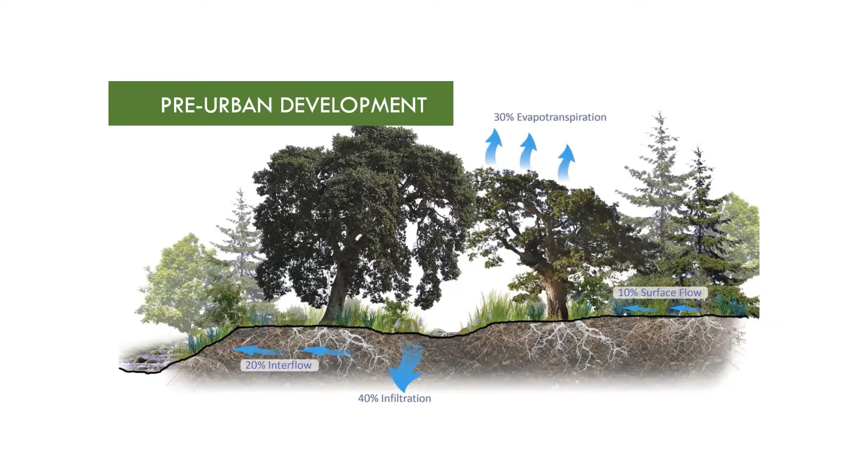Let's do a quick crash course on stormwater and how we can help schools become resilient landscapes for more comfortable, enjoyable, and dynamic learning spaces for students that can also help our communities reduce pollution and adapt to climate change impacts. In a pre-urban development condition, a healthy, undisturbed landscape acts like a sponge by capturing, absorbing, and slowing the flow of water from the moment a raindrop lands on the ground. So this is how water should naturally cycle through the landscape.

But when cities develop, impervious surfaces are created that prevent water from being absorbed. Additionally, pollutants from streets and homes are washed into pipes and the closest bodies of water. The high volume and velocity of stormwater can impact the ecology of local creeks in the bay and the ocean, and also introduce harmful pollutants like litter, plastics, and a whole array of chemicals into the drainage system.

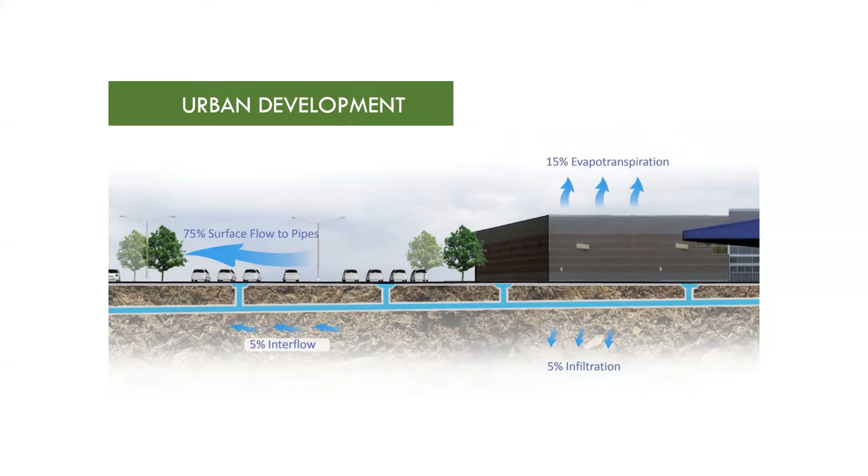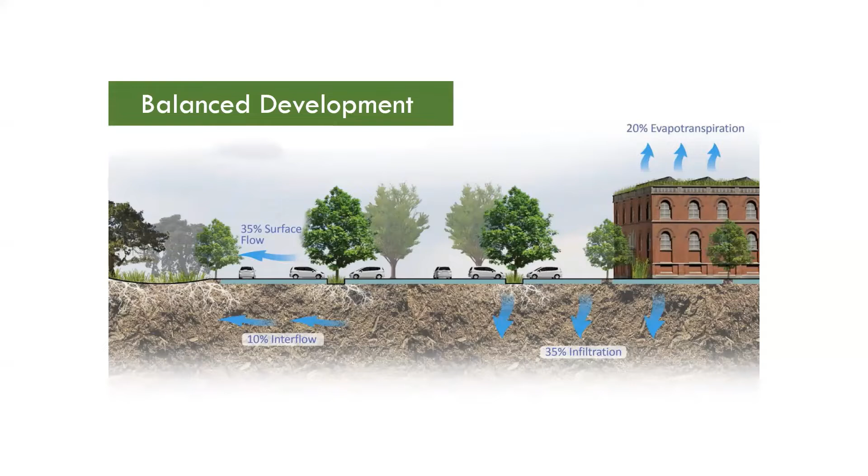Green infrastructure can minimize this impact. Green streets, green parking lots, and green roofs help return the hydrologic cycle to a more natural state. This transformation from gray to green can provide a lot of benefit to people and ecosystems. It can also happen in almost any setting, including schools.

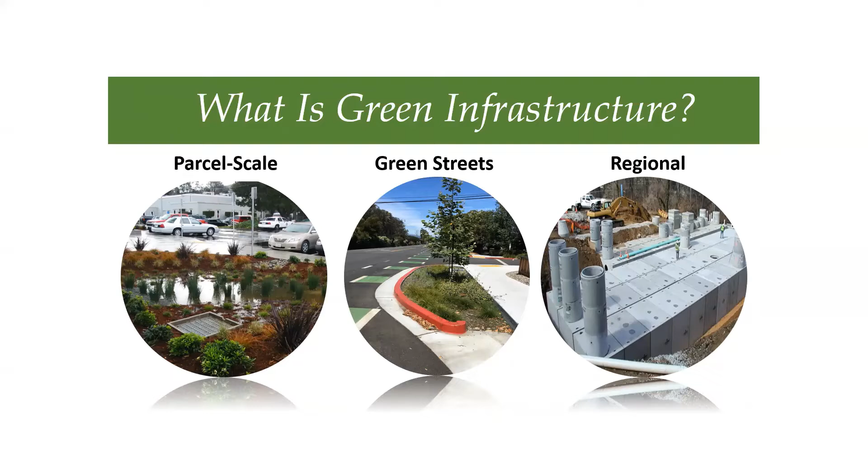Here are three main levels or scales of green infrastructure that can help us think about transforming the overall landscape from gray to green. Parcel scale projects capture and retain rainwater on site, like a building or parking lot. Green street projects capture flow from roadways at a block scale and often include curb extensions that allow water to flow in from the roadway through curb cuts. Regional scale projects can manage much larger drainage areas and may store water underground where it can infiltrate into the groundwater or be cleaned and reused in a park, for instance.

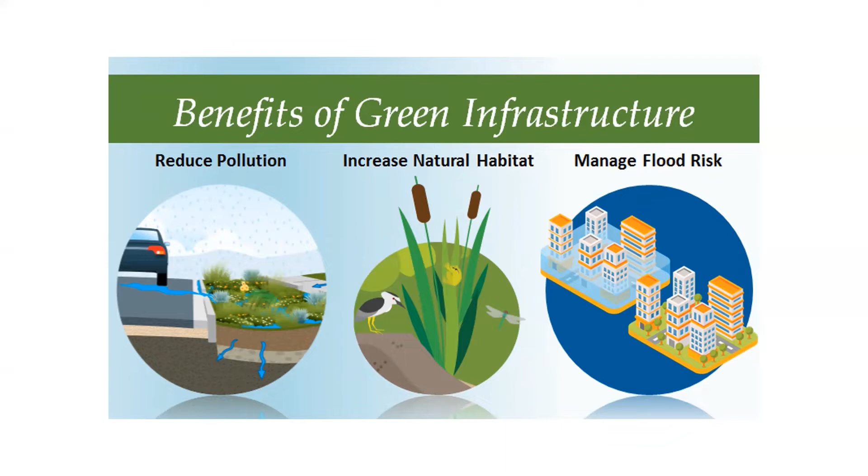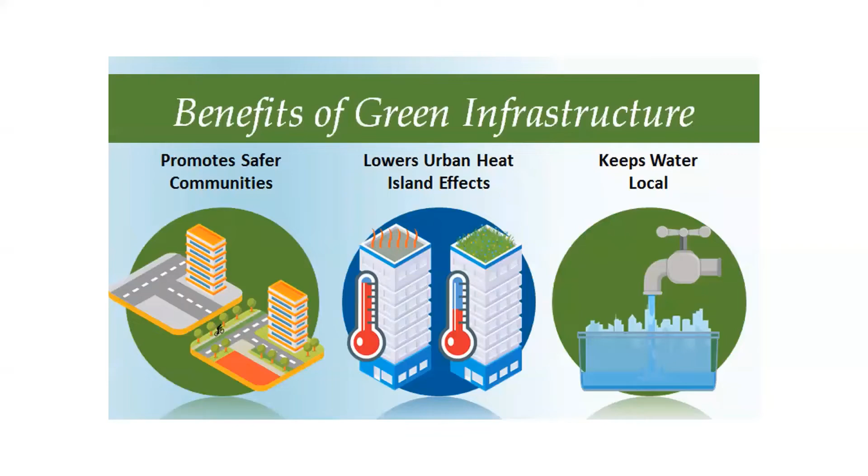There are many benefits of green infrastructure, from pollution reduction to increased biodiversity, to flood risk reduction, to safer communities, to reduced heat island impacts and augmenting local water supplies. So how does this all work at schools? First, at the site scale. Here are a few images from our Green Infrastructure Design Guide, which can be found at flowstobay.org.

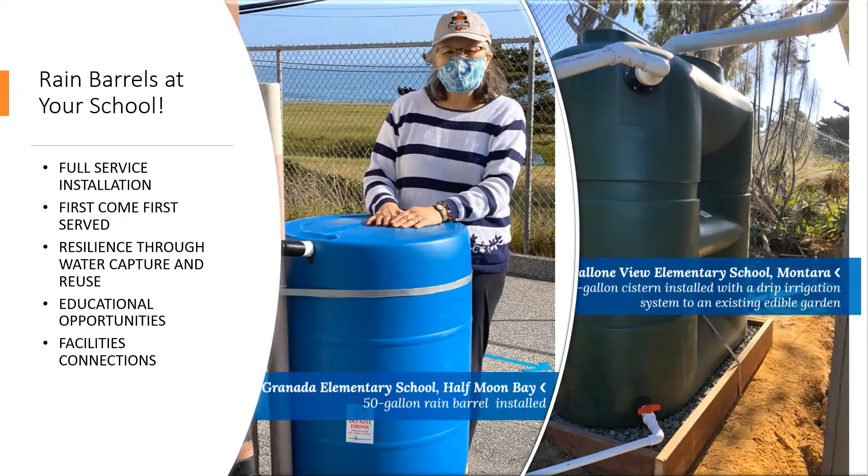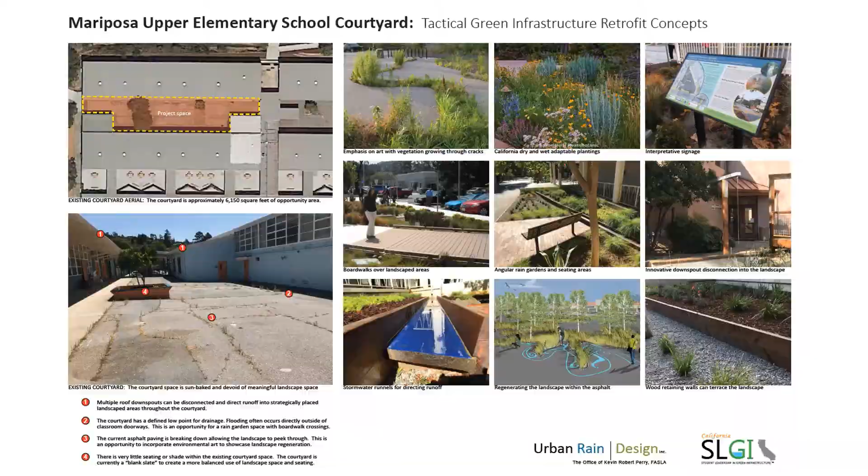At a campus-wide level, our program can begin helping schools rethink how water moves through the landscape and how to approach schoolyard greening from a variety of perspectives, whether thinking about adding more trees, replacing impervious surfaces, building rain gardens, or adding outdoor classrooms. There are many options to consider. And at a street scale, linking green infrastructure with crossing improvements is a great way to support safe routes to schools and managing stormwater more sustainably.

CCAG recently funded 10 projects around the county that integrate safe routes to schools improvements with green stormwater infrastructure. These projects support healthy transportation options for families and raise awareness of the benefits of green infrastructure. And lastly, at a regional scale, schools can be good opportunities to consider adding water resilient components to a park or parking lot replacement project, for instance.

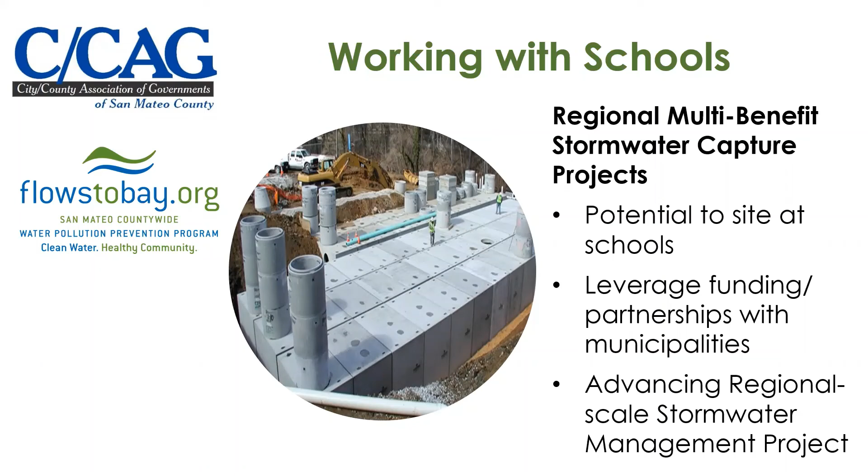School fields may be good candidates for a regional stormwater capture project, especially when they are in need of an upgrade. A large rainwater basin can be installed under a field, which can undergo its own makeover with new athletic amenities, lighting, shade trees, etc. At the same time, the community is provided with a significant water project that helps reduce the impacts of runoff like local flooding and may help offset on-site water use.

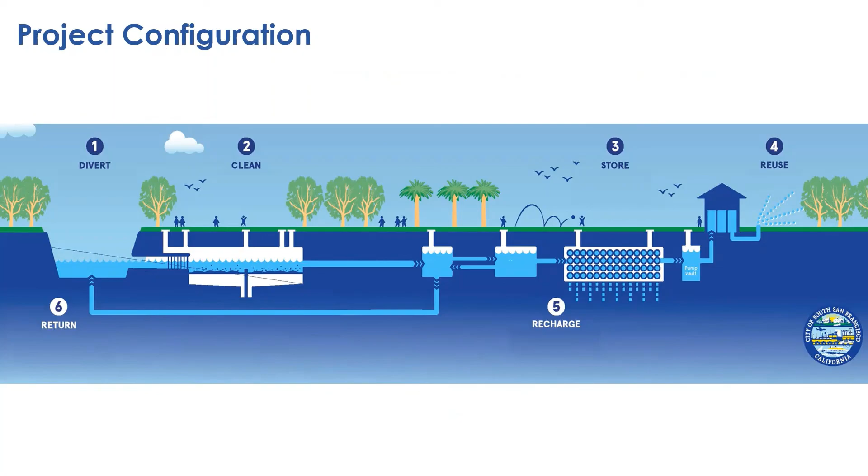Here's an example of a regional scale stormwater capture project that is currently being built at a park in South San Francisco, where water is diverted into a series of chambers that clean it up before it's infiltrated or reused to water the park grounds. That's our quick overview of rainwater resilient schools in San Mateo County.